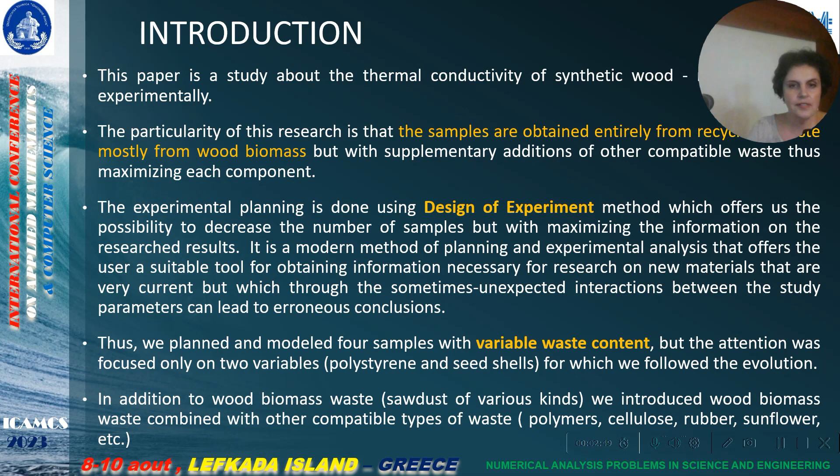We use this method mostly for concrete samples, and other kinds of samples, mortar samples, with all kinds of additions. And it's okay because we obtained good results.

Why do we use waste for our samples? Because of waste management. Looking in a European Union report, between 2010 and 2020, like you can see in the chart, the best ranked country in Europe was Finland, but on the opposite, countries like Croatia or Turkey had almost 2 tons of waste per capita, which means 10 times less, while Romania is above the European Union's average, with 5 tons of waste. It's a lot of waste.

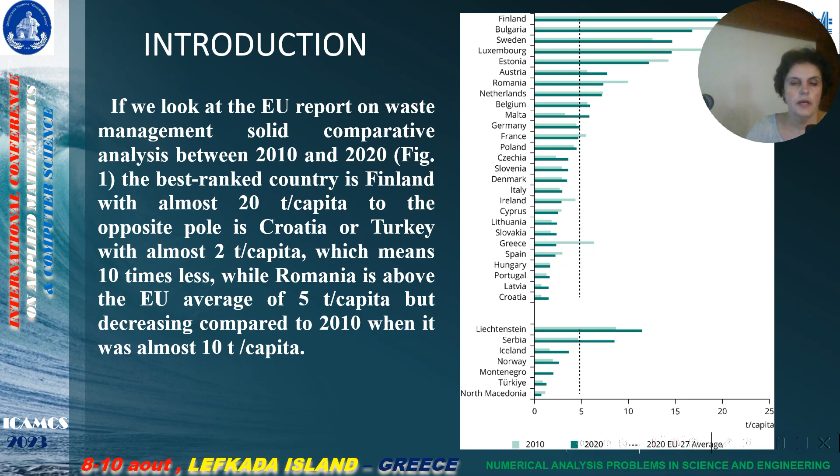This is the reason we try to obtain new materials using, of course, waste. But this is another discussion. I'll try to present our paper right now.

Design of experiment method, black box. The design of experiment method is an advanced method of planning, analysis, and optimization of complex problems like a black box. In a black box, like you probably know, things happen inside the box, but not all the things inside the box are directly controlled by us. But thanks to this technique, we were able and continue to be able to identify influential variables and mathematical models for the optimization process.

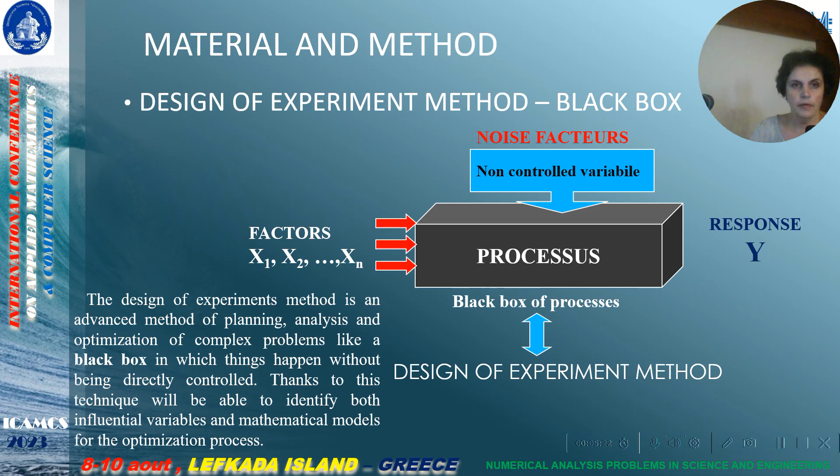So on the left side, you can see the factors x1, x2, xn which enter the black box. Then in the black box, of course we also have non-controlled variables called noise factors, and in the end we obtain a response or many responses, and of course we are interested in this response. It's very important for our research.

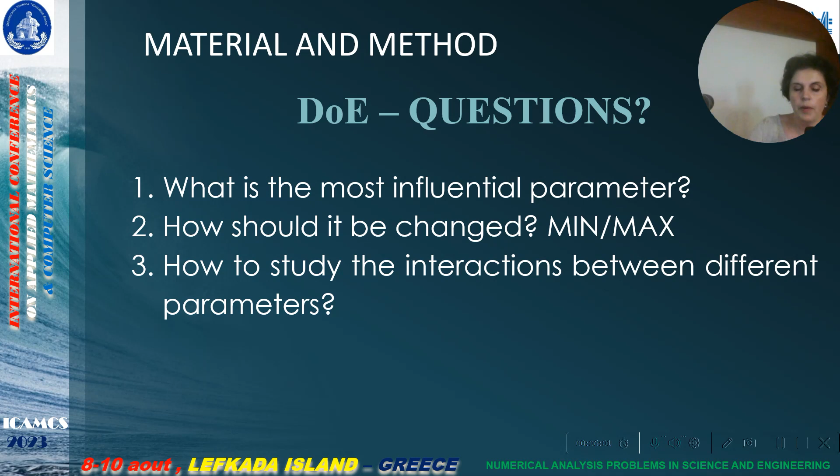The questions we used to put when we use design of experiment or another method. First, what is the most influential parameter? We have to identify the most influential parameter. Second, how should it be changed? What is the minimum? What is the maximum? And third, how to study the interaction between different parameters. These are our constant questions, let's say.

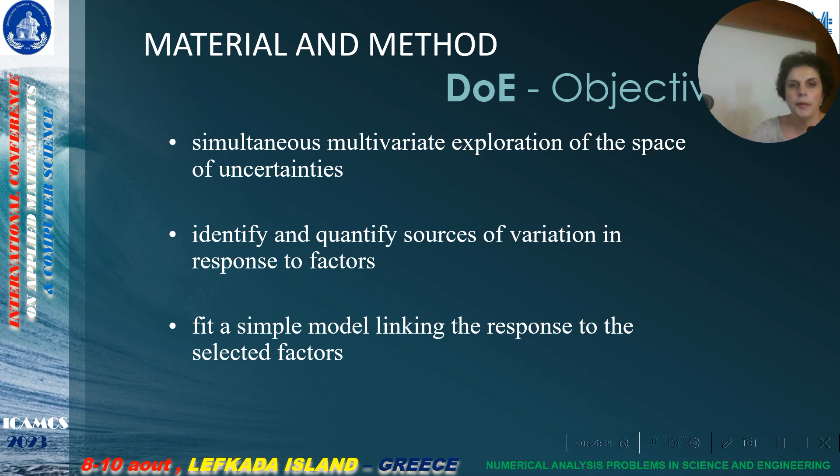And objectives for design of experiment: simultaneous multivariate exploration of the space of uncertainties, identify and quantify sources of variation in the response to the factors, fit a simple model linking the response to the selected factors. This is usually a problem. And very important is the identification of process parameters, which usually happens by experience, this experience coming from feedback, prior knowledge, or expert opinion.

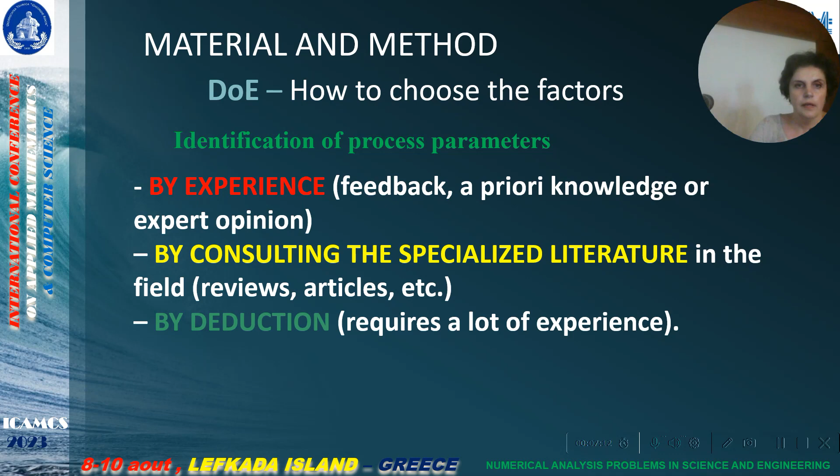Of course, we can identify them by consulting specialized literature in the field, reviews, articles, etc., and by deduction, but this requires a lot of experience. It's not so simple, and you can probably make some kind of mistakes. So for using the design of experiment method, we have to identify some parameters, like the materials we used. We used adhesives, biomass, different waste, and other kinds of materials.

Of course, operator and other influences appear in this part of parameter identification. For this study, we chose as parameter X1 recycled polystyrene, and as parameter X2 sunflower, it's a mistake, I apologize, X2 is sunflower husk waste.

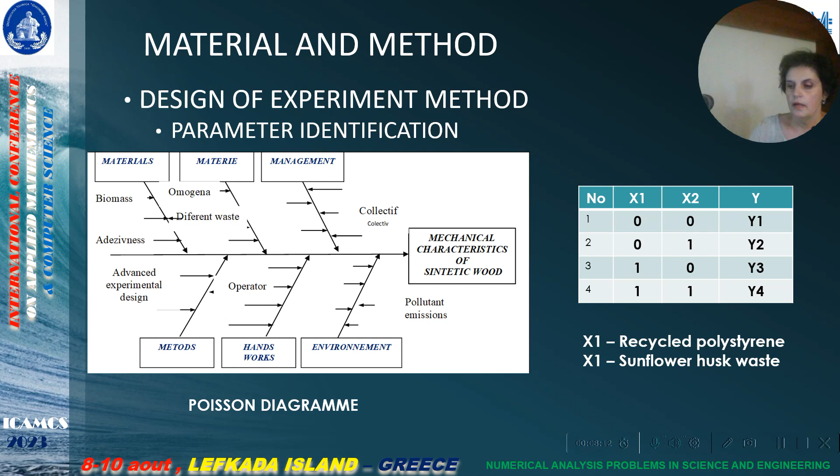So after we obtained all the samples, we subjected them to thermal treatment. Why thermal treatment? Because thermal treatment accelerates the reaction and drying process. And we chose 155 degrees Celsius, and we kept the samples for 30 minutes. Of course, the thermal treatment facilitates the creation of chemical bonds between the different components of the samples.

Speaking about wood or wood waste, the thermal decomposition begins at a little bit over 100 degrees Celsius. And when we reach 200 degrees Celsius, the reaction and the decomposition of the materials is greatly accelerated. And the maximum level is 275. Thermal degradation of the wood may also occur during prolonged exposure below 100 degrees, but this is another problem. The flash point of wood is between 200 and 275 degrees Celsius.

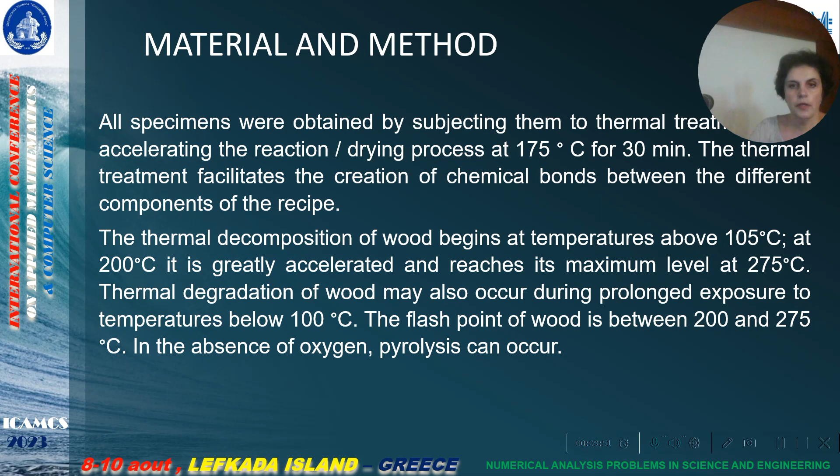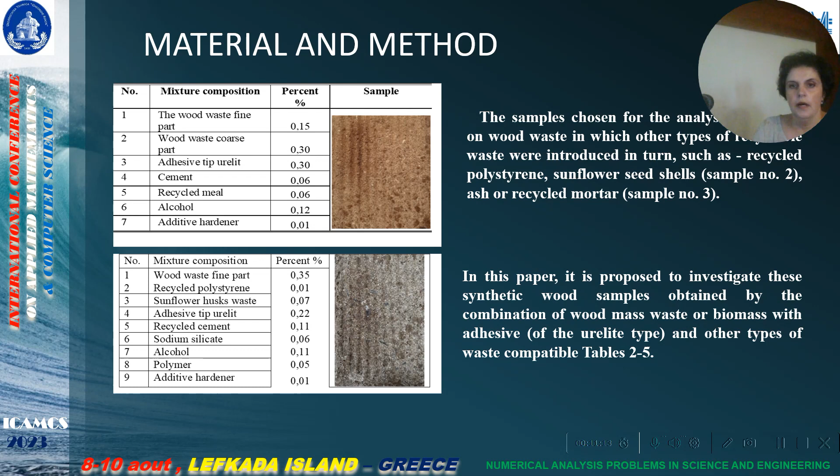In the second sample, we used also sunflower husks and recycled cement. We tried also with recycled cement. We made all kinds of mixture compositions. This is only an example. We made a lot of samples, and we tested every kind of sample. Like I said in the paper, it is proposed to investigate the synthetic wood sample obtained by the combination of wood mass waste and an adhesive and another kind of waste.

These are two other mixture compositions. Like you see, there are differences between them. And like I said, we tried all kinds of mixture compositions to choose the best of them. Like you can see in this part, we also introduced recycled polystyrene and sunflower seed shells as waste.

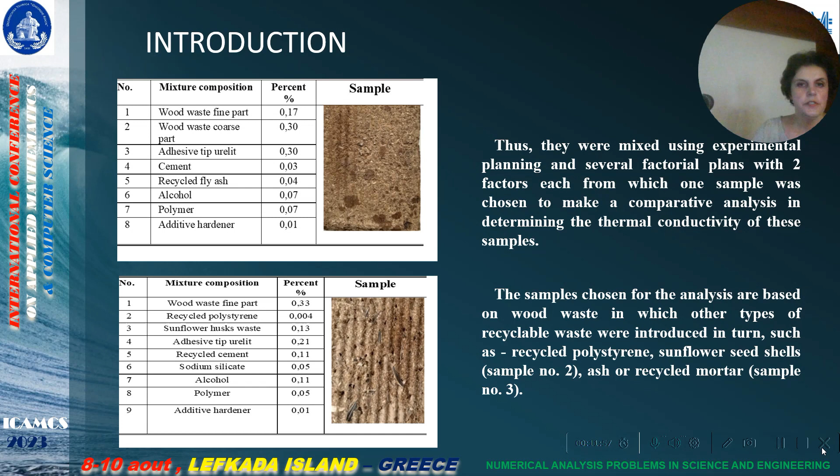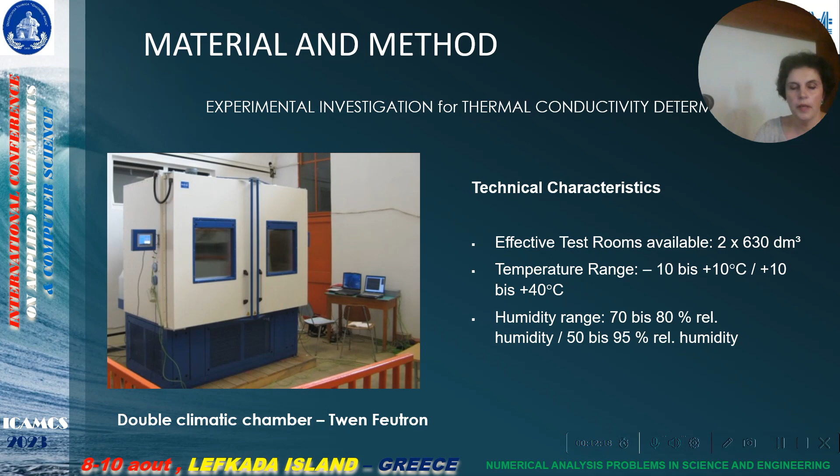And what I want to present to you right now is we introduced the samples in these double climatic chambers to test some technical characteristics like thermal conductivity. We determined the thermal conductivity of these samples. These are geometric characteristics of the specimen. You can see here the length, height.

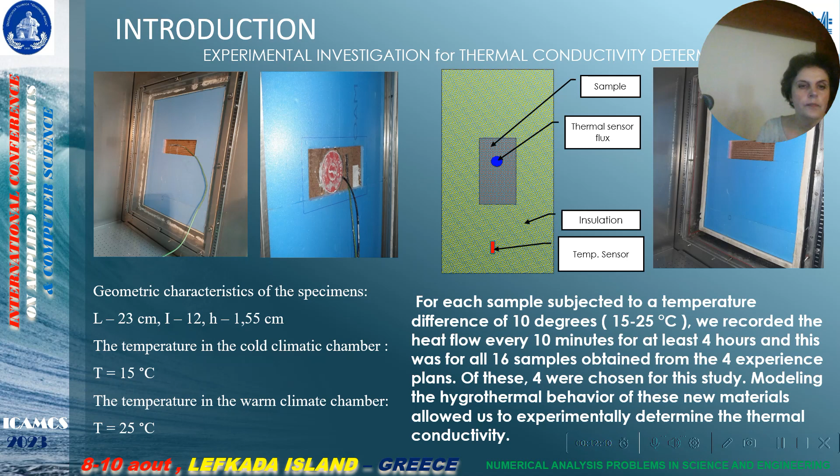The temperature in one part of the climatic chamber was 15 degrees at the beginning, and in another part of the chamber was 25 degrees. We subjected these samples to a temperature difference of 10 degrees, from 15 to 25 degrees Celsius. And we recorded the heat flow every 10 minutes for at least 4 hours. This was for 16 samples obtained from the 4 experience plans. Of these, 4 were chosen for this study.

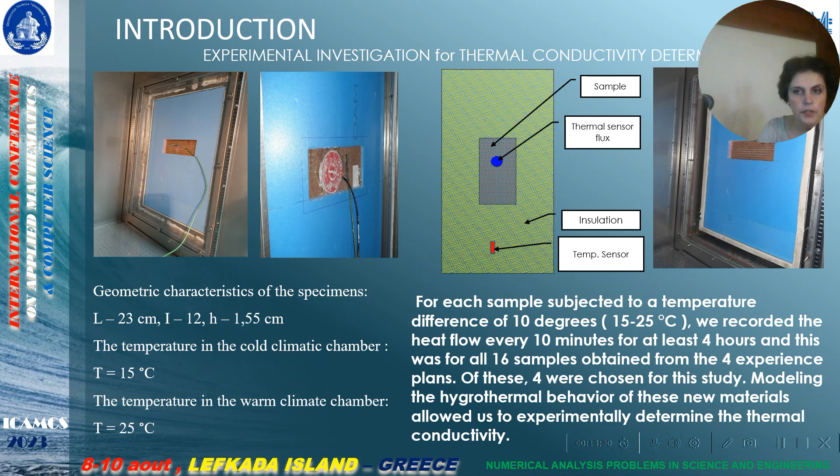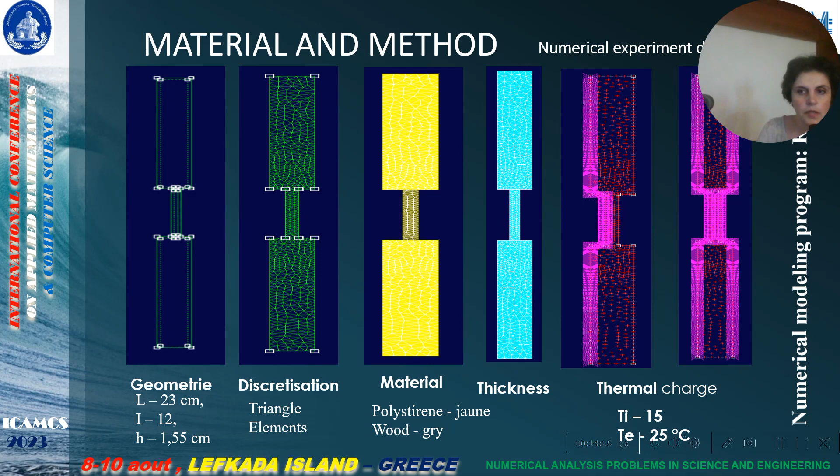Modeling the hygrothermal behavior of these new materials allowed us to determine the thermal conductivity. We chose the parameter geometry. We made a discretization of the samples in triangle elements. One of the factors was material, like polystyrene and wood. Polystyrene is yellow and wood is gray. We chose as parameters the thickness of the samples, and of course we studied the thermal charge for the samples. As results, we obtained the thermal flow and the difference of temperature.

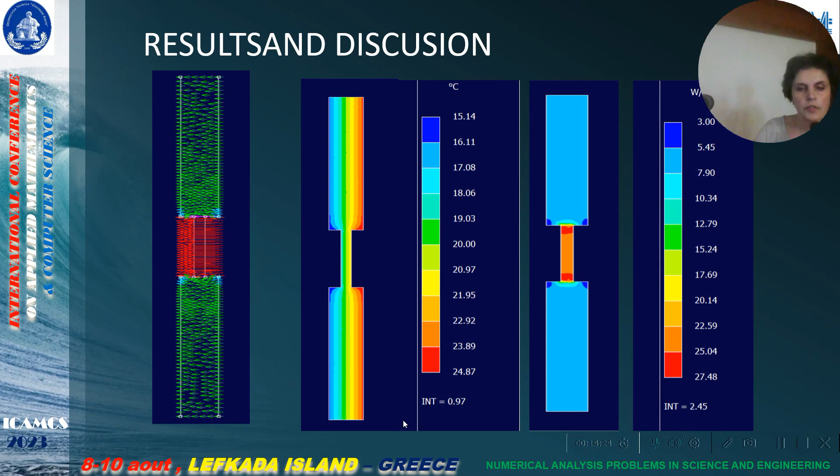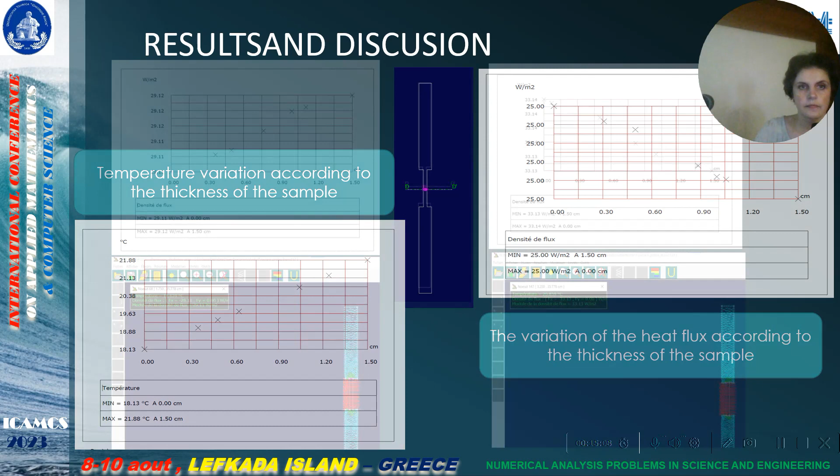In these charts, you can see here on the left side the variation of temperature according to the thickness of the sample. You can see Celsius degrees and the thickness of the sample. And on the right side, you can see the variation of the heat flux according to the thickness of the sample. Also, these are two results obtained for the thermal flow. And these are the experimental results.

You can see here in this column, experimental thermal conductivity compared to numerical thermal conductivity. Practical results and results obtained using numerical thermal conductivity. And we were very pleased to see that the difference, like you can see, is very small. It's really very, very small. And this is a wonderful situation because usually you cannot obtain such a small difference between experimental and

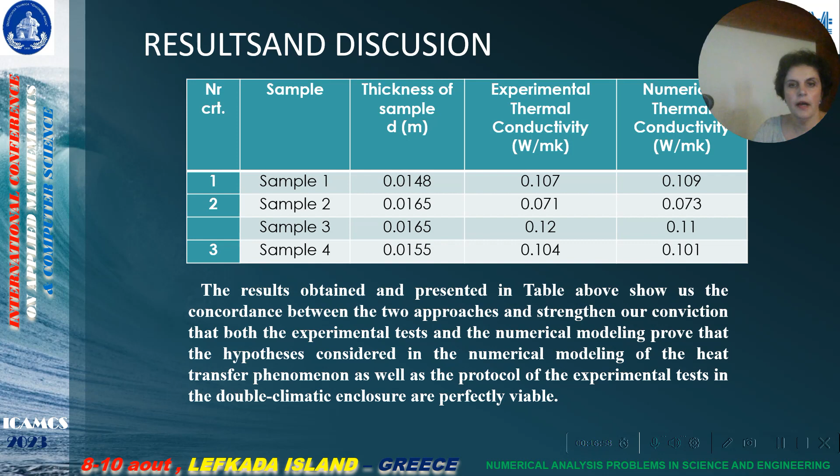numerical results. The results presented in this table show us the concordance between the two approaches and strengthen our conviction that both the hypothesis considered in the numerical modeling of the heat transfer phenomenon, as well as the protocol of the experimental test in the double climatic chamber, like I showed you before, are perfectly viable. Like I said, the difference is very, very small.

In conclusion, this paper was a comparative study to determine the conductivity of synthetic wood obtained with the addition of recyclable waste. The main purpose was to highlight the thermal characteristics of the new material, but also to numerically validate these characteristics. We tested several specimens in the double climatic chamber and determined the energy flow that crossed the new material.

The values obtained for the thermal conductivity of the synthetic wood are between 0.071 and 0.107 experimental, and between 0.073 and 0.109 numerical, which places it in the category of insulating materials, and that is very good considering that its rigidity is quite good, and it can be used for both thermal and sound insulation and perimeter closure.

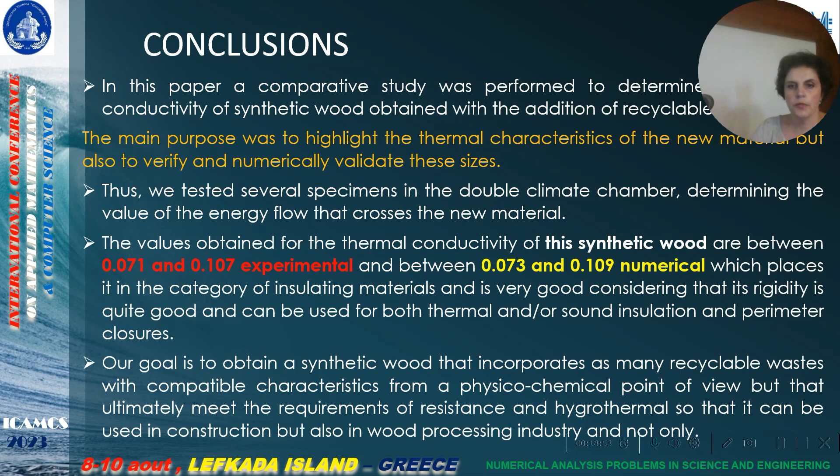This is our area. Our goal is to obtain a synthetic wood that incorporates as many recyclable wastes with compatible characteristics from a physical-chemical point of view, but that will ultimately meet the requirements of resistance and hygrothermal behavior, so that it can be used in construction, but also in the wood processing industry, and not only for waste management, of course.